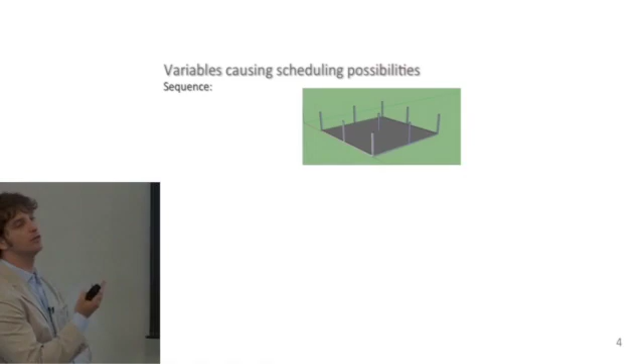A simple example is taking a look at 9 columns. You have 9 choices to install the first column, 8 for the second, 7 for the third. There's actually 9 factorial, or 362,000 ways, to install 9 columns in sequence.

Another such variable is labor capacity. Think of a construction manager considering up to 5 carpenter crews, up to 5 masons, up to 5 rebar crews, or up to 5 MEP crews. That's a total of 625 resource capacity configurations that the manager needs to consider.

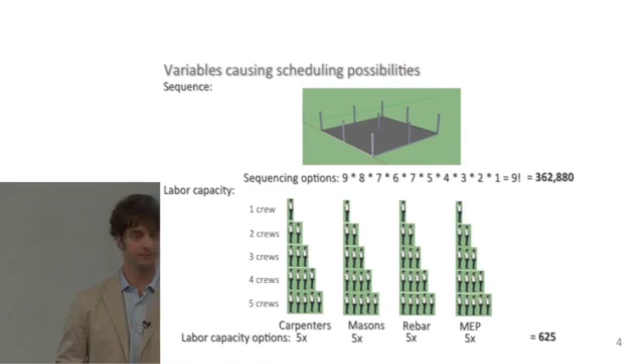And these are not the only 2 variables. I've introduced construction sequence and labor capacity. Another such variable is schedule execution, and more precisely, what I'm interested in are delays. When you delay a construction project, you poorly execute it halfway through, and that changes the ranges of metrics that are available to you in the future.

Another variable I'll be looking at is the construction scheduling method. Each method models constraints differently and therefore has different limitations. I will show you the limitations of current tools today in this presentation.

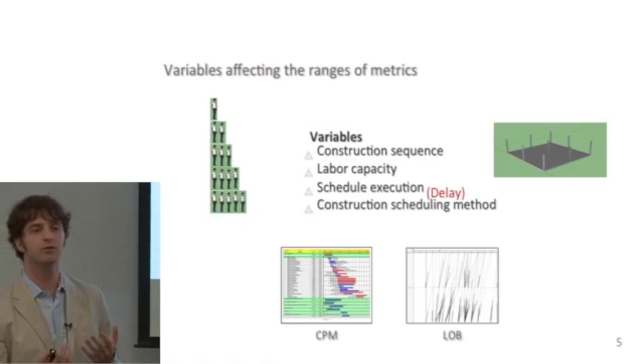The second observation is that construction sites are empty. I've worked on construction projects across 3 continents, and I can assure you that almost all of them look something like that. I invite all of you to look at the next construction site you see and count how many people you see on site. Think of how much extra work you could be doing at this given time.

To validate this observation, I performed an experiment on the IR Deto project in the Netherlands, where I split the project into 403 zones, each one roughly the size of this room. I found that on average, 3% of these zones were being used for construction.

I repeated this experiment on the bioengineering, chemical engineering project next door, where I took a photograph of 18 bays every 21 minutes and counted which of these bays had people inside of them. And I found again that roughly 3% of the space was being used for construction.

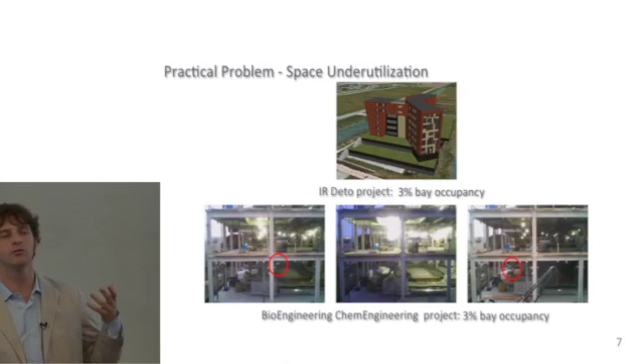These are 2 projects 10,000 miles apart, and these numbers were consistent across times of the day and days of the week. 3% is an extremely low number. This really tells you that construction scheduling methods need to maximize space utilization, therefore shortening construction duration. Empty construction sites point to a significant potential to schedule more processes concurrently, increasing space utilization and reducing construction duration.

But you can't simply increase space utilization by just cramming a lot of people onto a construction site. That leads to spatial clashes. An example of a spatial clash is if you have a construction layout like this one, and you schedule process A and process B at the same time. It leads to a spatial clash, which reduces safety, quality, and productivity, and is thereby undesirable.

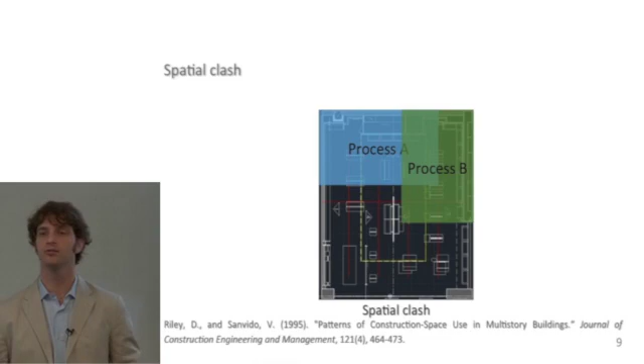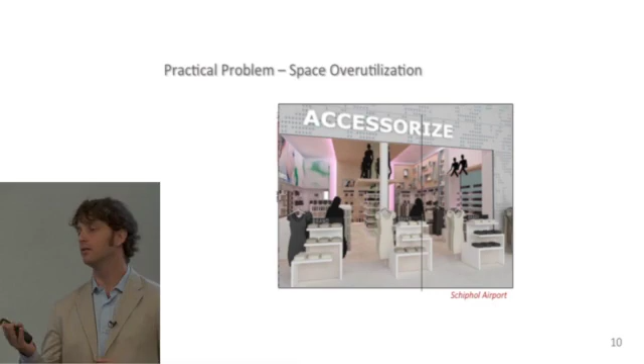I validated this correlation between overuse and reduced productivity on the Accessorize project, where a project that had a duration of 4 weeks was forced by Schiphol Airport, the airport in Amsterdam, to a duration of 2 weeks. This was a hard deadline. This area would turn airside, and to access it, you need a plane ticket. This resulted in 61 spatial clashes that I measured on the construction site, which caused 18% of the total labor hours to be lost. This shows you that construction scheduling methods need to eliminate spatial clashes.

So you need to maximize space utilization while eliminating spatial clashes.

Clearly, there's a trade-off between space utilization and construction duration. So how do construction managers find that right level of space usage amongst the millions of scheduling possibilities that exist? Well, today they create a single schedule using the critical path method or the line of balance method. This is inefficient, and I will later show you why.

Imagine that you create a single construction schedule represented by this dot here. Even when you draw the axes of construction duration and space usage, my question to you is, how good is this schedule? How close to the limits, or how fast is it compared to other schedules for this construction project?

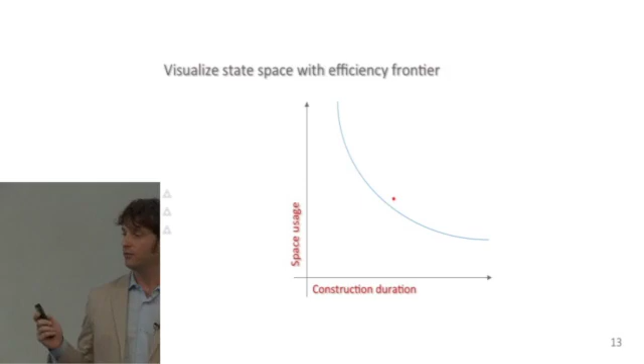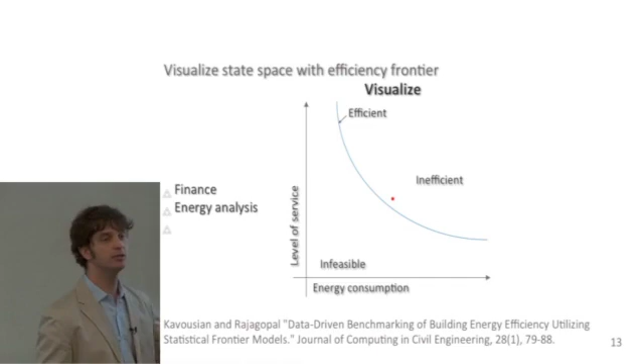Other fields understand the trade-off between two metrics by drawing an efficiency frontier that visualizes the sets of efficient, inefficient, and infeasible solutions. In finance, you correlate risk and expected profit. In energy analysis, they correlate energy consumption and level of service. And in healthcare, they correlate the number of nurses and dialysis machines to the number of patients treated.

So I started to get interested in whether you could do this for construction. And if you could, then this line would represent the fastest a construction project could be built for a given level of space usage, which I would call the operational efficiency frontier.

The research question that I'm presenting here is, what is a method for construction managers to visualize the scheduling state space by demarcating the sets of infeasible, efficient, and inefficient scheduling solutions? Once you have this frontier, you still need the schedules.

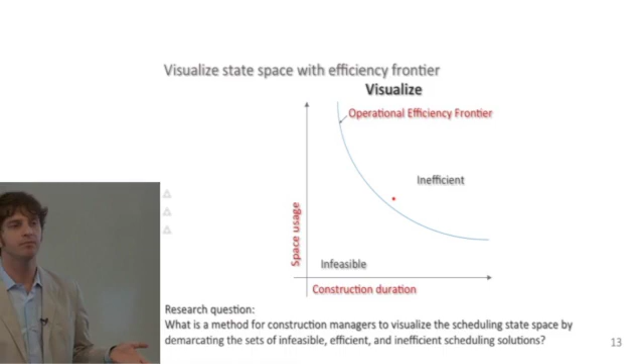You need to go out there and build it. So what you really want to know is, which of these variables that I introduced can you change to navigate the state space by automatically generating thousands of feasible schedules?

And the research question is, what is a method that enables construction managers to navigate the state space by automatically generating multiple feasible schedules? Once you've generated these schedules, what you want to do is manipulate the efficiency frontier.

Manipulate the efficiency frontier with these variables and move it to a new location, thereby enabling more efficient solutions for your construction project. And the research question is, what is a method that construction managers can use to manipulate the sets of infeasible, efficient, and inefficient solutions?

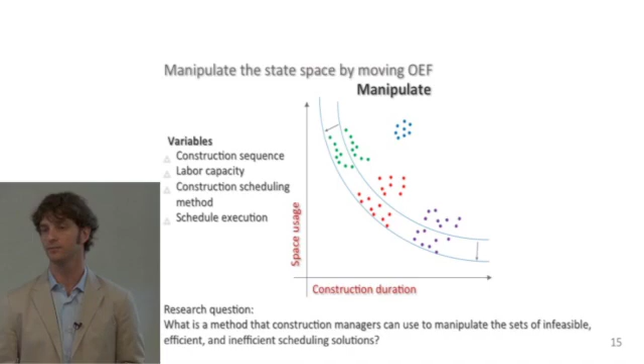To recapitulate, the first research question is, how can we draw the operational efficiency frontier that divides the state space into efficient, inefficient, and infeasible solutions? The second question is, how can we move that frontier? Which variables allow you to move that frontier? And the third research question is, what is a method that enables construction managers to automatically generate construction schedules?

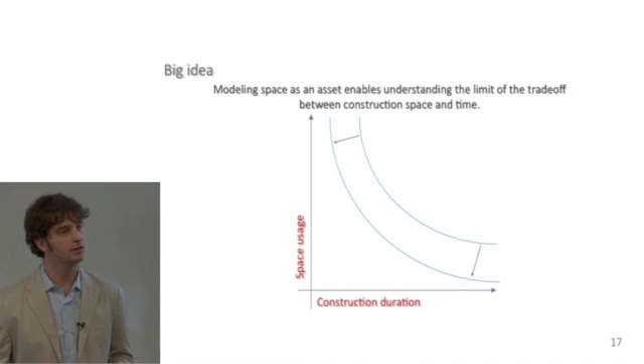So the big idea theoretically is, how can you model space as an asset that enables understanding the limit of the trade-off between construction space and time? From a practical perspective, if you understand this limit, you can then move it, thereby enabling faster construction schedules.

So I'll start with my first contribution, an automated scheduler called the tri-constraint method. And before I introduce the tri-constraint method, let me tell you about what construction schedulers need to do, be they human or algorithmic. At the very least, construction schedulers need to create feasible schedules.

To do that, they must satisfy functional requirements. You cannot exceed the available labor, you should not schedule crews in the same space, and you need to satisfy the laws of physics. The mechanism that guarantees that you do not violate these functional requirements is called the constraint.

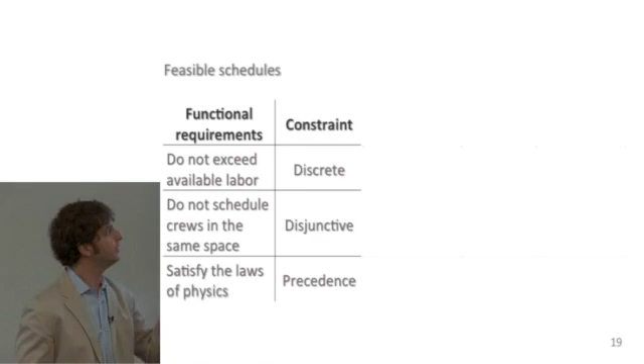The constraints that model these three requirements are discrete, disjunctive, and precedence. And what distinguishes these constraints from each other, and this is a critical point, is the types of resources that they model. The discrete resource models labor.

And what's special about labor is that it can have a capacity greater than 1. You can have 2, 3, 4 cranes. You can have 2, 3, 4 crews, right? What's special about the disjunctive constraint is that it models the space resource, which has a unary capacity.

There's only one space that all construction processes on a construction site need to use. All processes use the exact same space, and there's only one space.

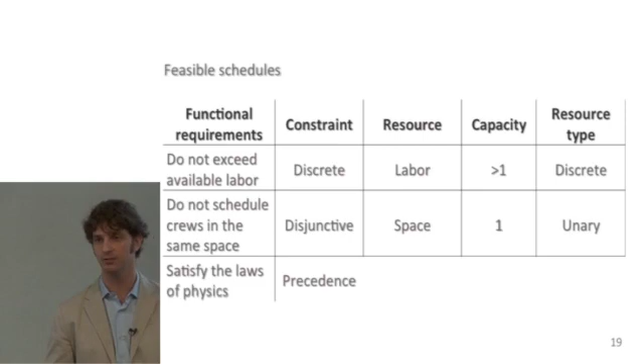And what's special about the precedence constraint is that it does not model resources. You either turn it on, and you get logical schedules, or you turn it off, and you try to build a roof before the foundation.

It took me 3 years to unify knowledge from other fields into the table that you see today, and to categorize the constraints this way. And it's critical to the construction method that I've built.

So what is happening in construction management or construction scheduling today? Precedence in terms of constraints. Precedence constraints were introduced in 1961 by a previous professor at this department, and they have been operationalized for over 50 years using the critical path method—really the most widely used, the founding stone of construction management today.

Discrete constraints, like labor, have also been extensively researched, and they're applied to what is called modified CPM. So they modify the CPM by adding discrete constraints to it, and that has been researched. What has not really been studied a lot is the disjunctive spatial constraints.

The key to understanding disjunctive spatial constraints is understanding spatial representation. There are 2 ways you can represent spaces. You can either use an area value, like 50 square meters, or you can use Cartesian coordinates. The area values don't use reference frames. They're not located anywhere. And the Cartesian coordinate systems are differentiated by whether they use a geocentric or an allocentric reference frame.

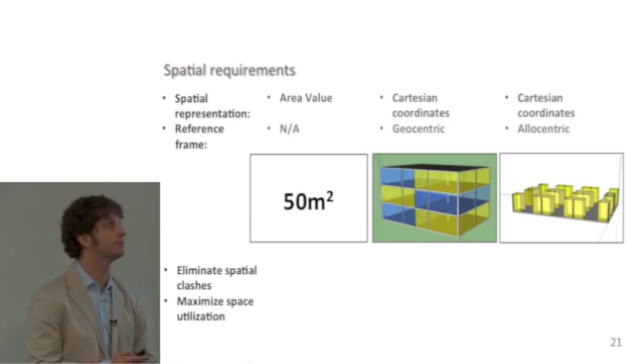So let's look at the 2 requirements that we set forth originally, which was eliminating spatial clashes while maximizing space usage. With an area value, you don't know where that area is, and so it's not possible to see if they're adjacent or on top of each other. So you can't eliminate spatial clashes and maximize space usage.

With geocentric reference frames, you can partially avoid spatial clashes by not scheduling processes in the same zone, but you can't tell if work in adjacent zones interferes with each other. You can only sort of look into one zone at a time. And you can't schedule more than one process in a zone concurrently, so you can't maximize space usage. What really allows you to maximize space usage while eliminating spatial clashes is Cartesian coordinates and allocentric spatial requirements.

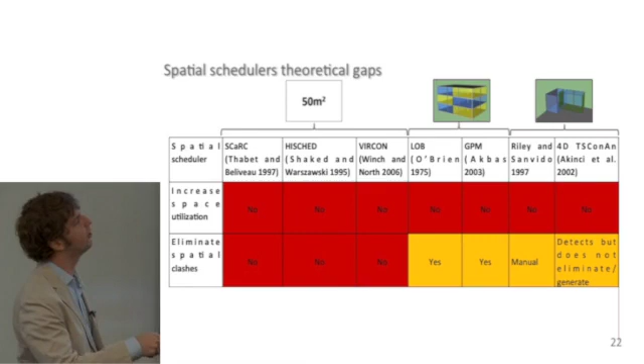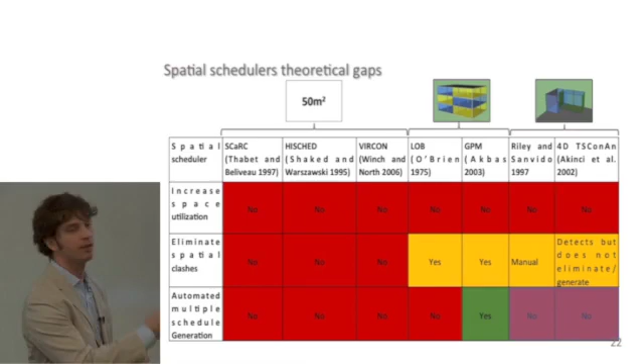That's all they do. If you look at the ability to automatically generate multiple schedules, you can see that the theoretical gap lies because allocentric Cartesian coordinate spatial representation has not been combined with automated schedule generation. And this is what I have done.

So now I will refine research question 3. How can construction managers navigate the state space by automatically generating multiple schedules? By resolving precedence, discrete, and disjunctive constraints, using construction process spatial requirement allocation methods that use allocentric and Cartesian coordinate spatial representation. So what you're trying to do for your scheduler is resolve precedence, discrete, disjunctive constraints, and for the disjunctive spatial constraints you want to use allocentric and Cartesian coordinate spatial representation.

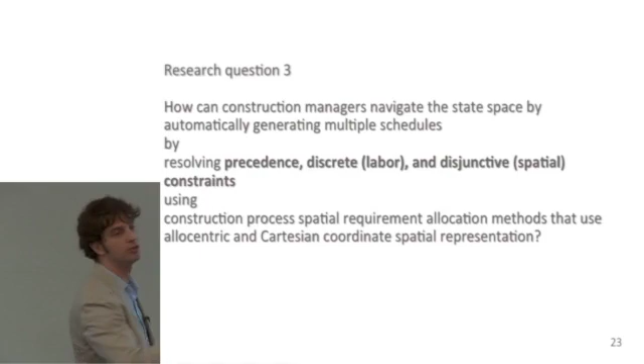So how did I answer this research question? I created a method called the tri-constraint method. It's called the tri-constraint because it models those three constraints. I used a prototype software to run this method, and then I compared its results to those of the two most widely used scheduling methods in industry today, the critical path method and the line of balance method. The critical path method is the one used by most of the industry. The line of balance method is a spatial scheduler, which is why I wanted to compare my spatial scheduler to it.

And we tested it on 3 construction project case studies. So what is the tri-constraint method?

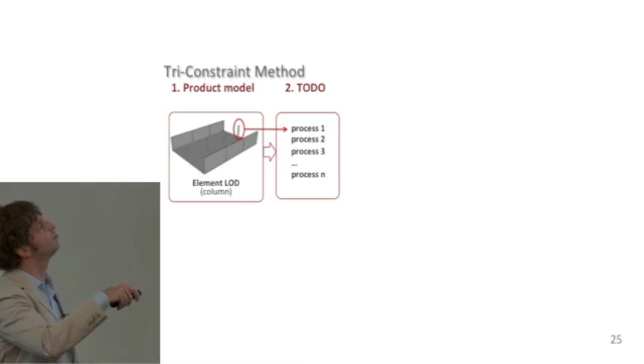You start with a product model, and this is what you want to build, what you want to end up with and hand to the client. You convert the elements in the product model to a list of processes that you need to do, the to-do list. If you execute all of the processes in your to-do list, you will have your product model. This is actually a 19-step process that I'm not showing here.

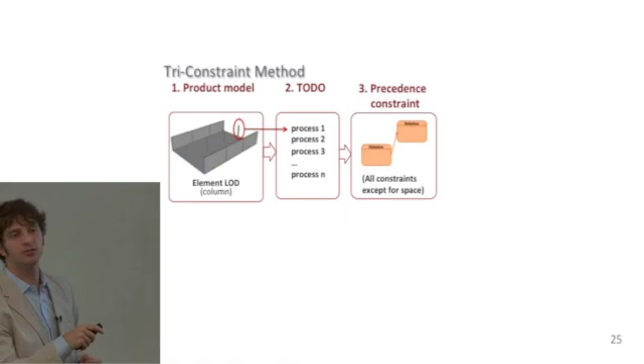Then you apply precedence constraints, which removes processes from the to-do list that violate precedence constraints. At this point, you have a can-do list that satisfies precedence constraints. Then you apply the disjunctive spatial constraint to get a can-do list that satisfies precedence and space. You apply the discrete resource constraint that removes the processes that violate that constraint, and you get a can-do list that satisfies precedence, space, and discrete resource.

At this point, you have a list of processes that you can schedule. You can schedule these to create a feasible schedule. You select the top one, and you schedule it. And that's really the core of this method.

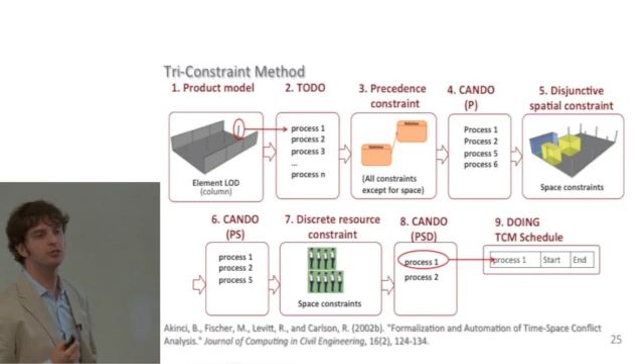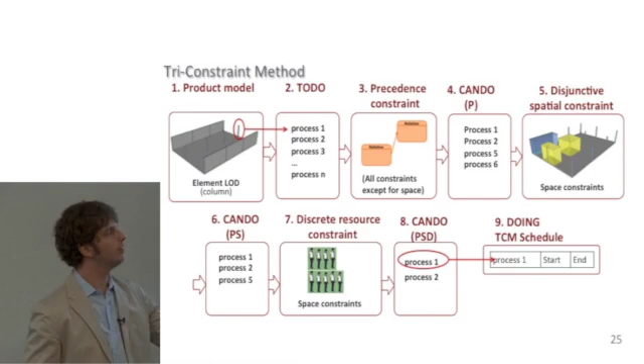The second thing I have done is I've introduced a method that shuffles in the next simulation. The method remembers the order of the can-do list, and it changes it by moving process 2 to the top, and scheduling, instead of process 1, schedules process 2. This is really what enables varying sequence, which is what gives you the thousands of feasible scheduling solutions. This has also not been done in the context of a spatial scheduler.

So we now have a spatial scheduler that can generate thousands of feasible schedules, and we can measure the construction duration for each of these schedules. What we want to do is measure the space usage. And if you look at space utilization metrics today, you can see that no space usage metric really allows you to measure space utilization for an entire project. Current space utilization metrics only allow you to measure space utilization for single processes or groups of processes. So we need a new metric.

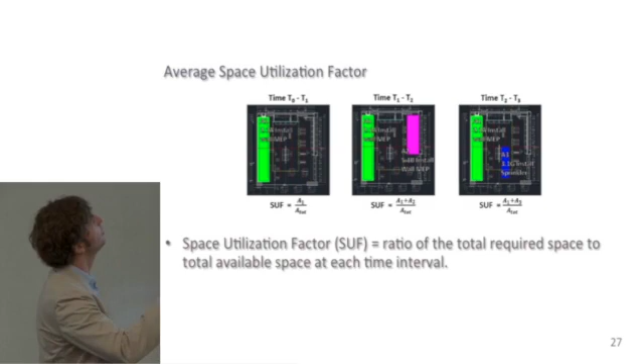And I did this by introducing the average space utilization factor. The average space utilization factor uses the space utilization factor, which is simply the ratio of the total required space, the ratio of these colored rectangles, divided by the total available space, the black rectangles, at each time interval in the project. You simply average the SUFs to get the average space utilization factor, the ASUF. This is a metric that gives you space utilization for an entire project.

Just a quick clarification. Is that the space that has all the prerequisite activities performed for these activities to take place, or just space in the building somewhere that may or may not be ready for these tasks to be done? So this is the entire space. Yes, yeah, ask me that. This is a good question.

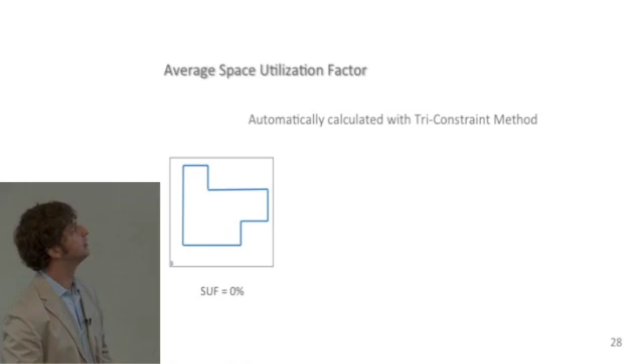So this average space utilization factor is automatically calculated with the tri-constraint method. The blue line represents the boundary of your construction site, and you can see that 0% of the space is being used in this image. Here you can see that 100% of the space is being used for construction, then 83 and 48%. So when you average this for the entire project, you get 72%, which is your average space utilization factor.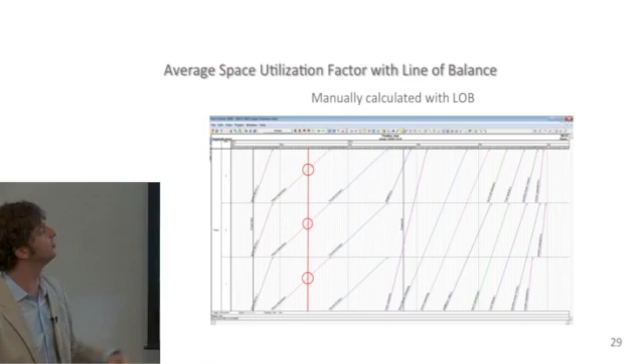Another example is for this day. You can see that work is occurring in zone 1, nothing is occurring in zone 2, and work is occurring in zone 3. You do that for the entire project, average the numbers out, and you get your average space utilization factor.

So what we want to do is compare the tri-constraint method to the CPM and line of balance schedules. To do that, we'll run 10,000 TCM simulations, create a line of balance schedule, create a CPM schedule, and then compare the space utilizations and construction durations for these three methods.

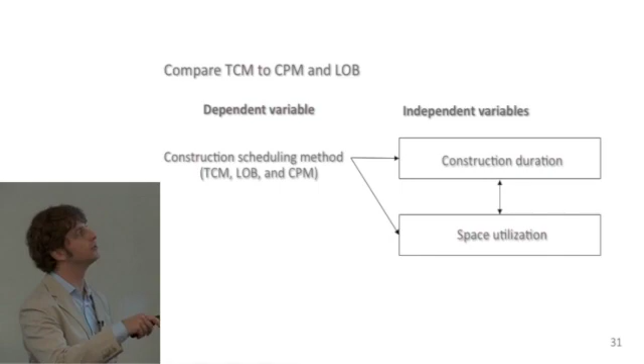The dependent variable of this experiment is the construction scheduling method, whether you select TCM, line of balance, or CPM. You want to study the effect of these scheduling methods on construction duration and space utilization, and then see the relationship between these two: construction duration and space usage. That's what we really set out to do.

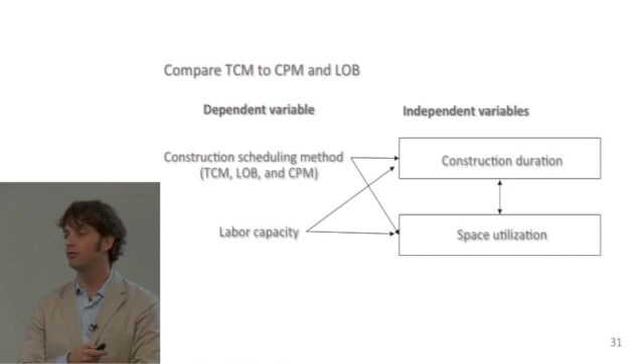The problem is that labor capacity also affects construction duration and space utilization. Therefore, to eliminate the effects of this variable, we remove it by assuming infinite discrete labor resources for this experiment. So we'll assume that you have as many people as you need at any time.

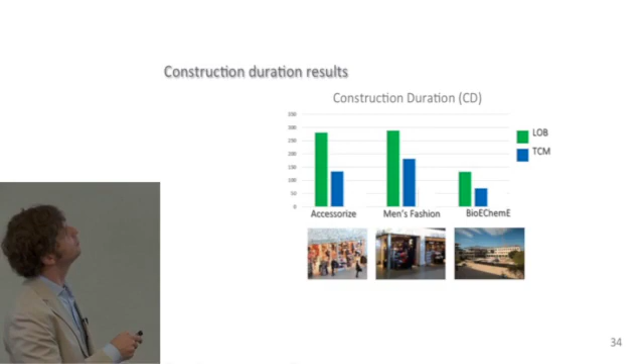So what are the construction duration results between these three scheduling methods? When you compare the line of balance method to the tri-constraint method, the new method that I developed, you'll see that the line of balance method has durations on average 45% longer than TCM. This is for two reasons. The first is that the line of balance method uses these large chunks of space, which is pretty inefficient compared to the smaller, exact spatial requirements of TCM.

The second reason is that the line of balance method only creates one schedule, whereas the tri-constraint method looks at 10,000 possibilities.

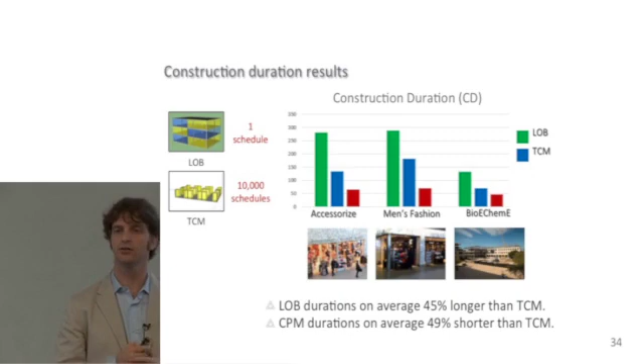So now let's look at the critical path method, the most widely used method in industry today. You can see that the critical path method durations are half as short as those of the TCM method. So you might be thinking, well, CPM is the method I want to use. Well, the reason you get these short durations is simply that if you assume infinite resources, CPM schedules everything in the same space at the same time, which is not feasible.

This is the method that's used by industry today, the most widely used method. It does not model space. It does not let you understand how to move crews or work through space.

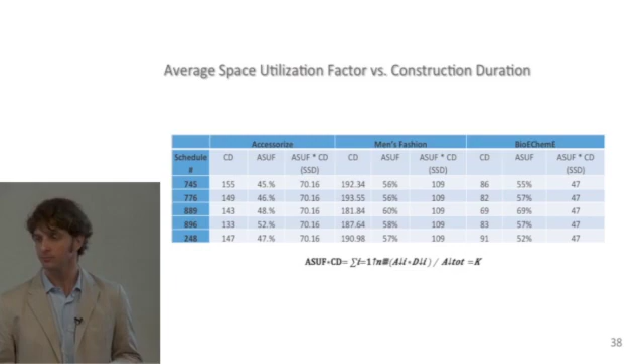And it's actually a mathematical formula given by this: the average space utilization factor multiplied by the construction duration is the sum of all the individual processes times the area of the individual processes times the duration of the processes, that whole thing divided by the area of the construction site. Just to give an example, the ASUF times the construction duration, which is a constant, is area of process A times duration of process A, plus area of process B times duration of process B, plus area of process N times duration of process N. This whole thing is summed and divided by the total area.

This constant that you're calculating does not require you to create a schedule. It's really easy to calculate. All you do is multiply the areas times the durations and divide by the total area of the construction site.

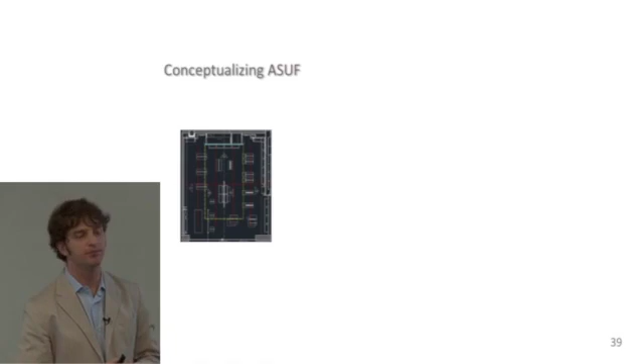To conceptualize the average space utilization factor, I'll show a graphical way that demonstrates it. Imagine you have process A with a duration of 1 hour that needs half the site, or 54 square meters in this case.

What you need to do is extrude the area by the duration of the process. So this is 54 square meters, and this is 1 hour. If you do that for all your processes for this construction project, each one of these blocks is a construction process. And that's what you end up with.

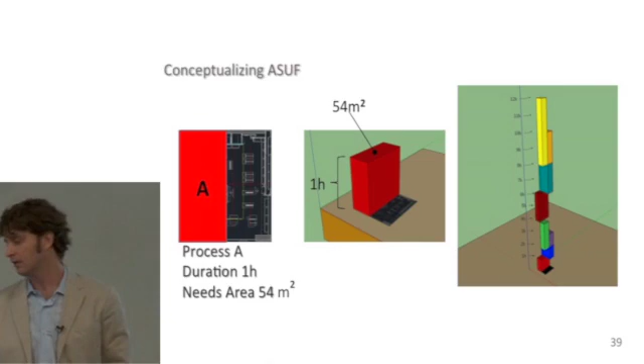So what is the construction process? If this is your processes, how do you build, or where's the time dimension? Well, you can see that with this graph over here. You start the project, and at time 2, you're working on the green and the blue process. At time 7, you're working on the light blue process. You can see that the black area at the bottom is your construction site, and you're really conceptualizing construction as throughput via the capacity of the construction site's area.

So why is ASUF times construction duration a constant, since that's what that equation gives us? The reason that it's a constant can be seen by taking two sequences. These are two actual sequences of the same project. In sequence X, you finish the project in 12 hours. In sequence Y, you finish in 9.

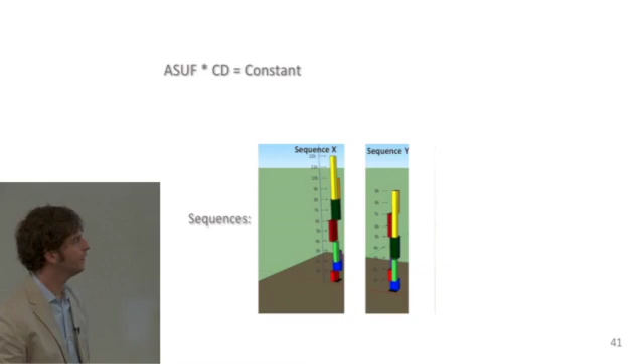You finish faster. So what's the average space utilization factor? Well, the average utilization of space is a column of uniform cross-sectional area. The average area of the colored blocks equals the white block in sequence X. And in sequence Y, the average area of the colored blocks equals this column. The volume of those blocks is constant. That's really what that constant is - it's just the volume of these blocks.

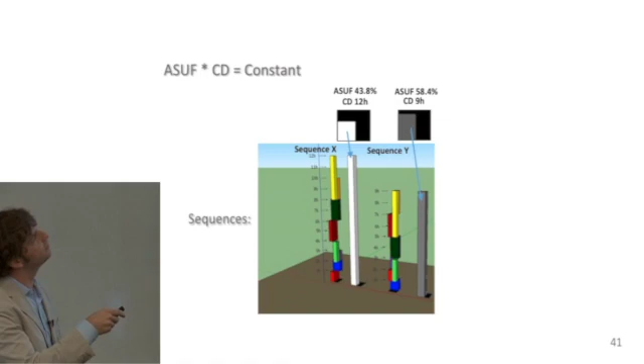So, of course, if you have a longer column, the white area is the percentage of the total area that's being used. You can see an average space usage of 43.8%. So when 43.8% of the total area of the construction site is being used for production, your duration is 12 hours. If you want to decrease the duration, you've got to increase the area for a fixed volume. I've used the same width, but you're using just that little bit more average space. From 43 to 58 reduces duration from 12 to 9.

And that's this equation here. This equation gives you the operational efficiency frontier. You do not need to calculate, you do not need to schedule to obtain this equation. So let's look at it for a little bit.

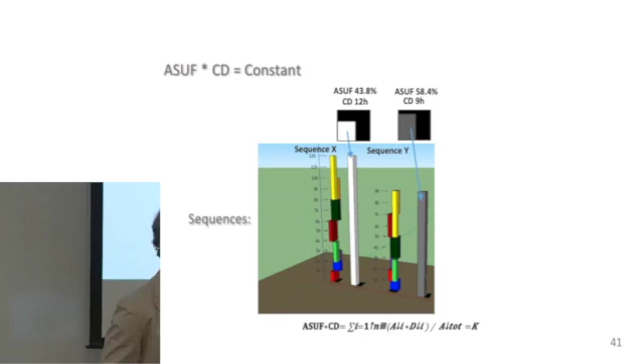What happens when ASUF is 100%? What happens when you use 100% of available space throughout the entire construction project? Well, 1 times the construction duration is a constant. So the height of that column, if you use 100% of available space for construction, is equal to the fastest that this construction project can be built if you do not allow spatial overlaps. It's kind of the same as if you took these colored blocks and converted them to water, an incompressible liquid. They would fill a column of this height.

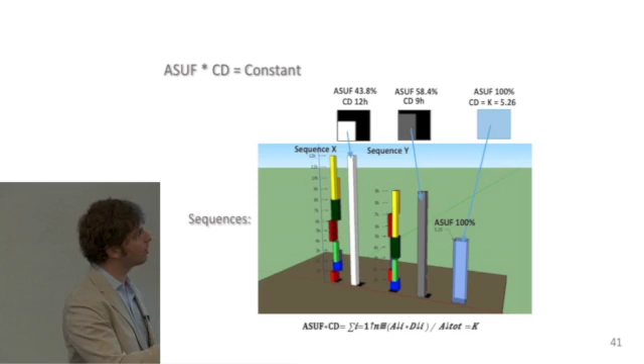You can also mathematically derive this equation, which I will not get into here. So what we want to do is understand the trade-off between space utilization and construction duration. To do that, I've shown you how to calculate this operational efficiency frontier, and I'll show you how it works next. What we really want to understand is which of these variables can you use to navigate along the frontier, and which of these variables can you use to manipulate the frontier to new locations.

I've shown you the operational efficiency frontier, the equation for that: construction duration times ASUF, average space utilization factor, equals a constant. What I'll do next is show you the effect that construction sequence and construction scheduling method have.

What we'll do is use 3 case studies, the 3 case studies that I think I introduced earlier. We'll take 3 construction scheduling methods: the critical path method, the tri-constraint method that I've introduced, and the line of balance method.

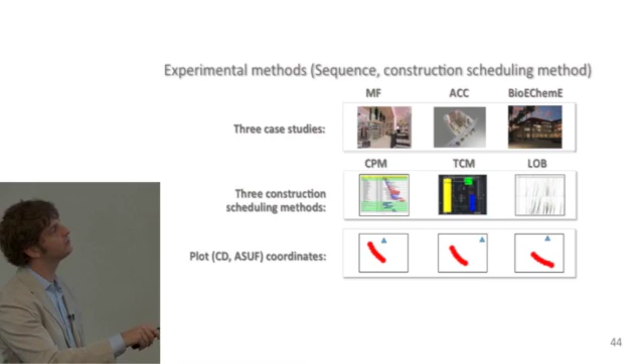We'll basically generate 10,000 schedules with the TCM method, and we have its CD, construction duration, and average space utilization coordinates, so we'll plot those onto 3 graphs for the 3 projects. Next, we'll create a schedule for the line of balance method and plot it there. And then we'll calculate the operational efficiency frontier for these 3 methods and plot it on the same graph.

So what do the results look like? We'll start with the BioEChemE project. First, we'll plot 10,000 schedules using the TCM method. You can see that this really shows you the effect of varying construction sequence. What is construction sequence? It really gives you these dots.

A human scheduler will create the line of balance method and manually calculate the average space utilization factor, like I showed you how. Then you create a CPM schedule. When you have infinite resources, a CPM schedule gives you one duration.

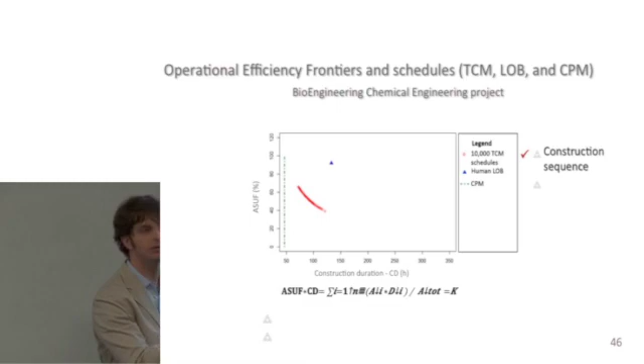CPM does not use space, so we basically drew a line that represents 0 to 100% space usage. That's the CPM method. Now we need to use this equation: for each of these projects, we took the area times duration of each process, summed it, divided by total area, and got an asymptotic curve.

We drew it for the line of balance method. That was the first thing we did. Notice that the manual calculation lies actually within 3% of the value predicted by this theoretical equation.

Then we plotted the operational efficiency frontier for these 10,000 points. You can see the effect that construction scheduling method, changing from line of balance to TCM, gives you a much more efficient efficiency frontier, and you can see that the durations are shorter, somewhere around 72 versus somewhere around 130.

So why is this the case? Where's the inefficiency coming from? This is comparing not two schedules, but two scheduling methods. The inefficiency comes from the fact that the line of balance method uses these large chunks of space. It gets the same result just using more resources, while a TCM uses the exact spatial requirements.

So just to contextualize this, you can see that the results you're getting theoretically are around the maximum you can get with TCM, around 60%, with the line of balance somewhere around 90%.

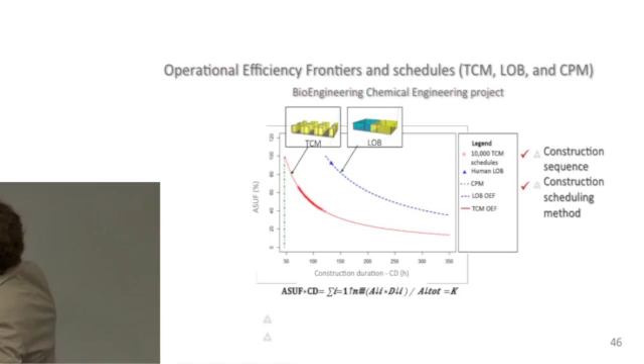So I'd like you to take your attention - if you remember, I measured that the industry today uses an average of 3% of space usage. So if you extruded this graph all the way to the X over there, that's where current construction industry practice is today, the red X outside. As you can see, there's significant potential to improve this process.

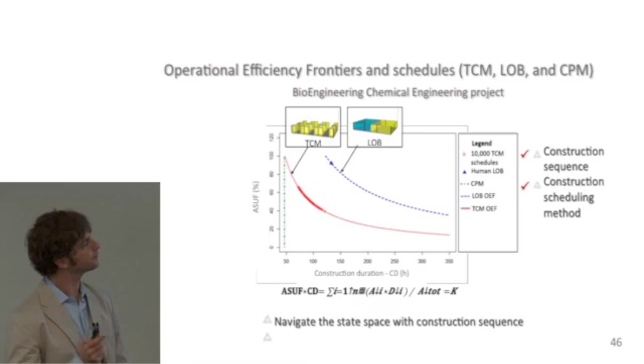So what I've demonstrated here is how you can navigate the state space with construction sequence, and I've also shown how you can manipulate the state space with construction scheduling method.

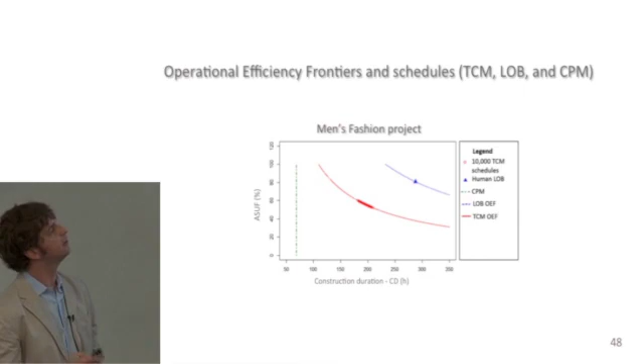For the three case studies, next we'll look at the men's fashion and the accessories projects. We follow the same procedure, and you can see that you get really very similar graphs. The TCM method is more efficient than the line of balance method in allocating space.

The CPM method, even though the tri-constraint method is designed to, at every point in the simulation, use all available space - it's a greedy-first algorithm that literally does not move forward in time until you run out of space. It just schedules everything it can at any given time, and it tries 10,000 ways to do it. You can see that you don't get close, nowhere close to the durations given by CPM.

CPM is in the set state space of infeasible solutions for this method, and it really is infeasible because it's scheduling everything in the same space at the same time.

So what I've shown is the operational efficiency frontier, how to navigate the state space with construction sequence and manipulate it with construction scheduling method. Next, I'll show you the effect of labor capacity.

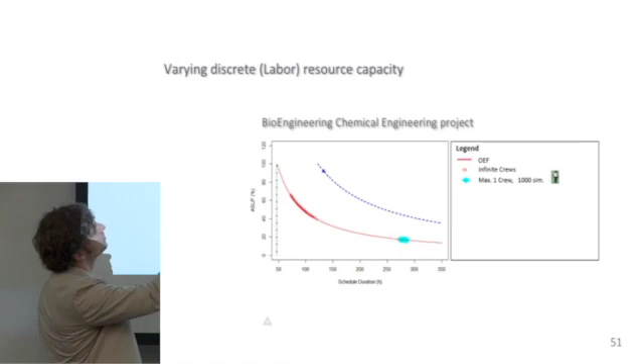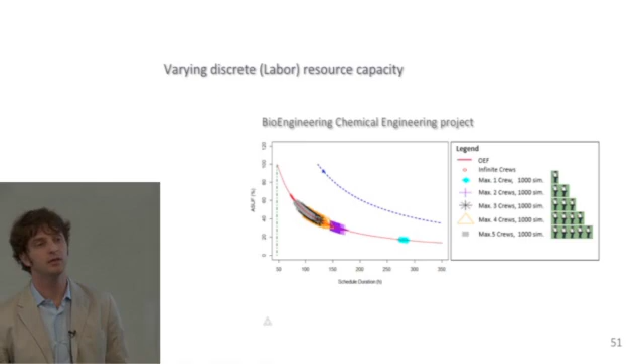So what if you have two crews available? That's 1,000 runs - three crews, four crews, five crews, and the red dots are infinite crews. You can see how you can navigate the state space with a discrete resource labor capacity variable.

So I've shown the labor capacity. Next I will show you the effect of schedule execution, more specifically, delays.

Consider an example project of 8 construction processes and 4 possible sequences. This is the Gantt chart. You can see that the colors are the same, representing the individual processes.

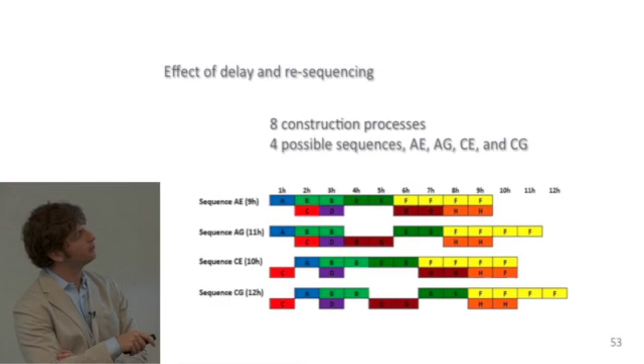For the same construction project, you have sequences AE, AG, CE, and CG, which give you durations of 9 hours, 11 hours, 10 hours, and 12 hours.

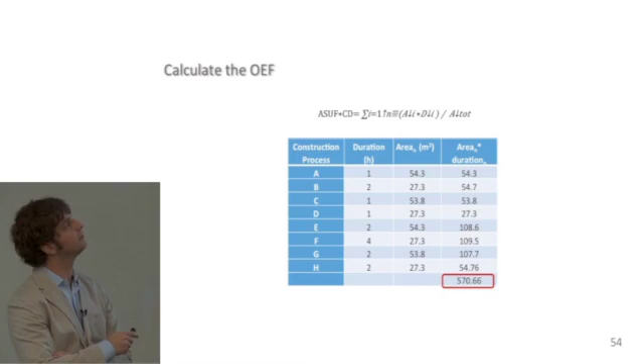You use this equation to calculate the efficiency frontier. You multiply the area times the duration for each process, you get the sum product, which is 570, and then you divide that 570 by the total area of the construction site, which in this case is 108 square meters.

That gives you a constant of 5.26. This is an asymptotic function, Yx equals k. So you plot this along with the 4 sequencing options that you have. At this point, you're on the efficiency frontier. There's no delays.

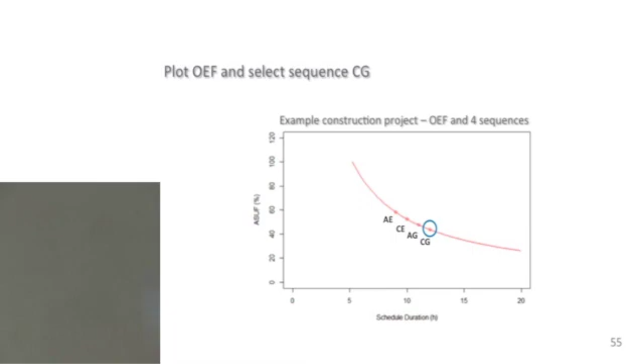You select sequence CG. Note that this is the slowest sequence available to you, but maybe you select it because it's the cheapest.

So the construction project starts, and as often as anyone in construction knows, one of the processes is delayed. If you recall, what we did originally is we multiplied these two, the area times the duration, to get 570, and we divided 570 by the total area to get the constant 5.26.

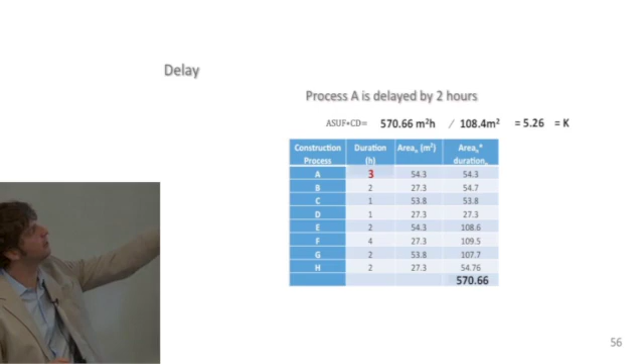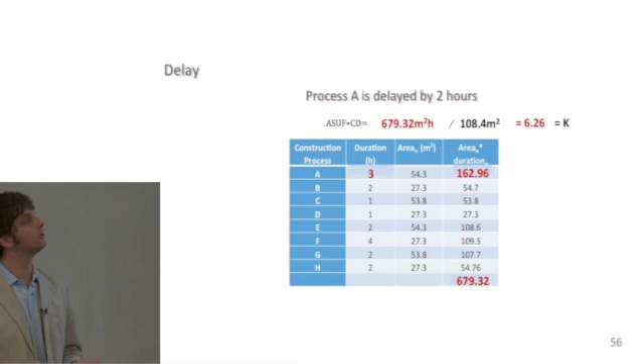Process A is delayed from 1 hour to 3 hours, which changes the area duration to 162, which changes the sum product to 679, which, with the same area, changes the constant to 6.26. For an asymptotic curve, increasing the constant moves the curve to the right.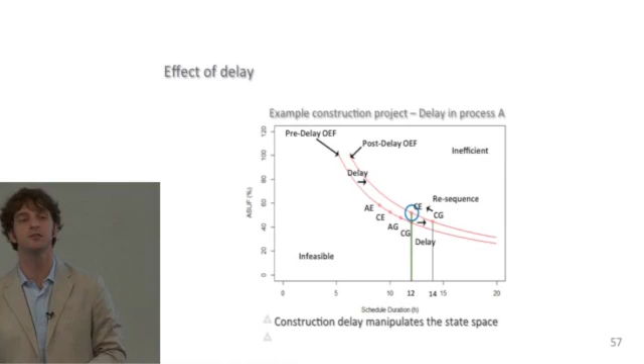What you can then decide is to mitigate this delay. You select sequence CE. You resequence from CG to CE, thereby mitigating this delay and finishing the project at 12 hours again. So this shows you how a construction delay manipulates the state space, and also how you can navigate the state space by resequencing.

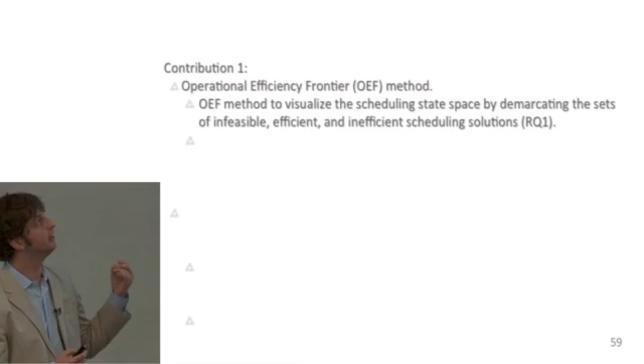So we've seen schedule execution and delay. The contribution I presented today is the operational efficiency frontier method, a method to visualize the scheduling state space by demarcating the sets of infeasible, inefficient, and efficient solutions. That's research question 1.

You can use that method with specific variables to move the operational efficiency frontier. I've demonstrated how you can do that with schedule execution, specifically delays, and the construction scheduling method, which is research question 2.

The second contribution I presented is the tri-constraint method, a method to navigate the state space by automatically generating multiple schedules. I've shown how you can vary construction sequence and discrete resource capacity to that end.

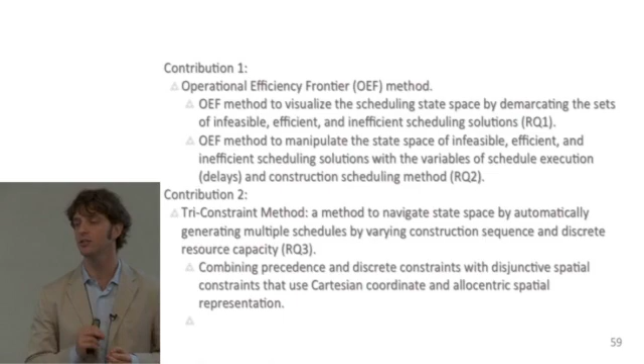More specifically, within the construction scheduling method, my contributions are that I've combined precedence and discrete constraints with disjunctive spatial constraints that use Cartesian coordinate and allocentric spatial representation.

The second sub-contribution for the automated scheduler is I've introduced a method that allows you to vary sequence by shuffling construction processes in the can-do list. This has also not been done.

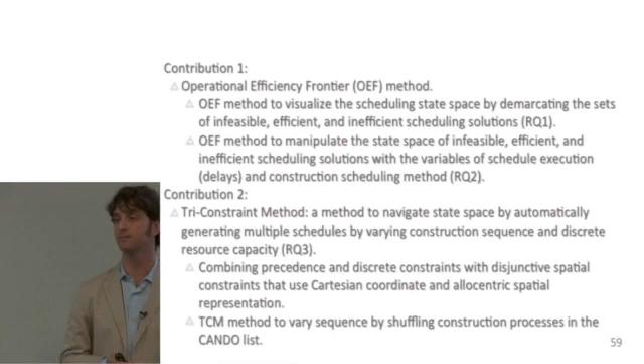So what are the practical implications? Well, first of all, I've placed an emphasis on considering space as a resource. You can really start thinking of throughput via construction sites' area capacity. Space has special properties: it is unary, there's only one space available, and at the same time it is free. That's why coordinating it is critical to construction scheduling.

Another implication is that with this method, you can generate thousands of feasible schedules, and you can visualize, navigate, and manipulate the state space. Simply put, these implications will make it faster and cheaper to build construction projects.

So for future work, I've introduced the operational efficiency frontier, an automated scheduling method, and shown how these variables can be used to navigate and manipulate the state space. Instead of what we're doing today, randomly varying sequence, you'd want to develop heuristics to generate not a random 10,000 set of schedules, but the right, quote unquote, set of schedules. You want a more effective way of navigation.

Next, you want to rank the can-do list, so not shuffle it, but rank it, for example, by location, which will enable you to do things such as workflow, which is not currently done in the method.

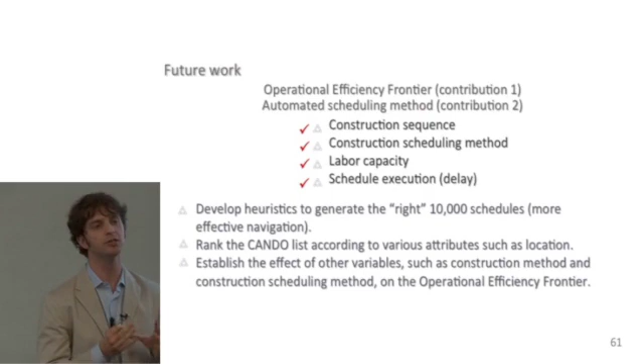And finally, I'd like to test the generality of the operational efficiency frontier in other fields. For example, can it be used in logistics?

So the PhD journey is a strange journey because it is one of the few journeys in life that you must tread alone. At the same time, it is impossible without the help of so many.

I would like to start by thanking the institutional support of CIFE, the Charles Leavell Fellowship, and Slavenburg construction in the Netherlands. Where would one be without their friends? They're really what pulled me through the low points during this research. So thank you. I have been, one of the great blessings of this endeavor was to be surrounded by colleagues of such caliber who served as examples which I have aspired to and learned from.

I have to thank the research assistants, first and foremost, for putting up with me during the endless hours of debugging, simulating, discussing, brainstorming, and researching.

I have to thank special people from the industry whose belief in an innovative construction future enabled this research, and they really helped us validate and crystallize some of these problems.

Thank you. Of course, a big thank you to Michael Lepech, Ram Rajagopal, and Warren Hausman, who are on my committee. In institutions such as this one, it is truly difficult to find people that will simply help.

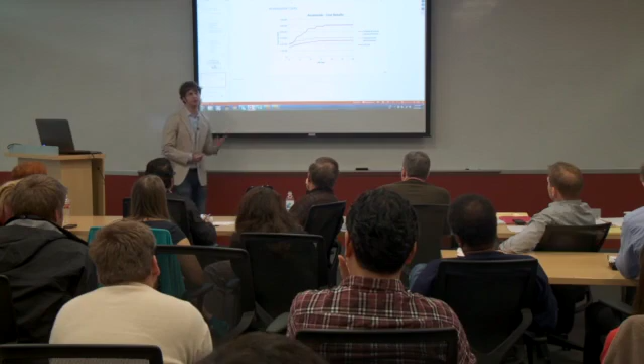What you're doing is calculating the number of idle days for each one of these schedules, so this is really calculating costs. So you're correct—within these 45 minutes, this work really doesn't represent a large portion of everything I've looked at. But the question is how do you look at idle days, coordination, etc. The key is you need to calculate... what I was optimizing for was duration, because of the mathematical relationship involved.

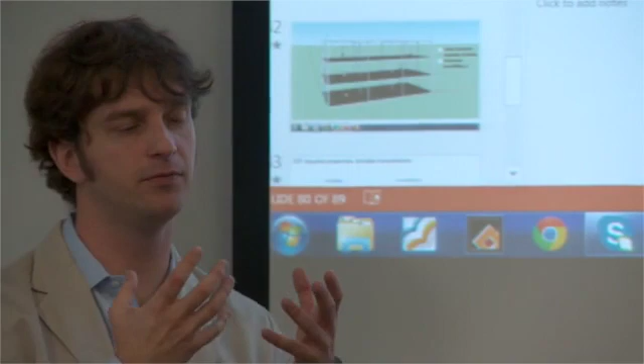But you want to optimize for idle days and ease of building. This also, by the way, ties into what Professor Levitt was saying, that a very critical part of the research was the definition of the level of detail. So basically what I'm doing is looking at the scope, the quantity of a product you're working on, and the reason I'm looking at single elements is because that's what BIM models are.

They're groups of elements. But to answer the question, what you want to do is aggregate these elements, because at this point in time—as Professor Levitt was saying—you can't give schedules that are that detailed. So you want to aggregate these elements to create schedules that humans can use. And that's really, I think, in construction, the solution: you need to create data or information at a coarse level of detail, increase it automatically, simulate at that level, and then aggregate it again.

And that would be a little like a critique about subcontractors having to have a relatively efficient use of the job sites, given all the other job sites they have to manage. Yes. Yeah, absolutely.

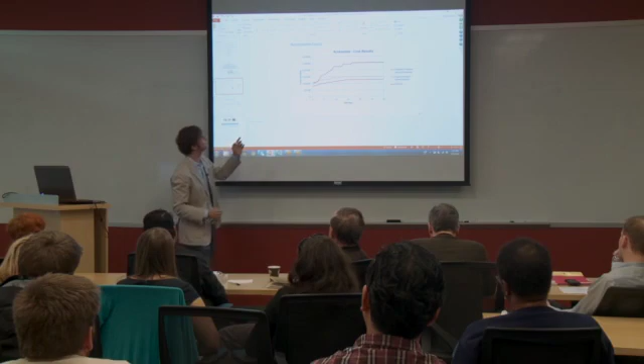What's the cost? The cost is fairly simple. Once you have the schedules, you just look at which crews are working on which day. And if somebody shows up to work, even works for 2 hours, you pay for a full day. You'll see here that, interestingly, the fastest schedules are a little more expensive than the cheapest, which kind of makes sense.

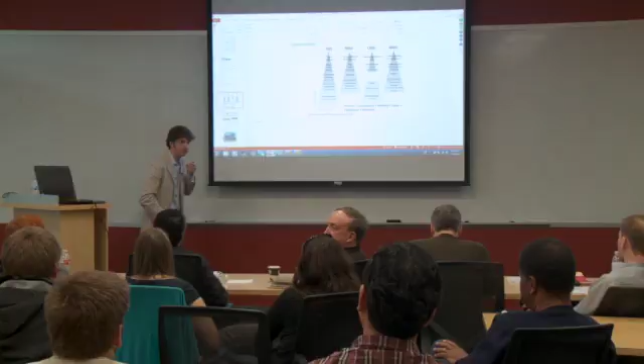Have you looked at the constraints proposed by the Toyota production method as maybe incorporating into your algorithm? So constraints such as? Let me look at available resources like steel and product resource availability and weather delays. I feel like those could be modeled as variables, including in the algorithm. The critical thing in this research is the level of detail.

What you're saying is other constraints. So other constraint types, there's two parts to this question. Within the types of constraints that I've shown, what other subcategories are there? So that's answered here. Subcategories are the product, the method, the organization, and the actual process. The organization can also be equipment or material. So those are basically discrete resources as well. One of them is a stack, because you put the crew back in the stack, material gets used.

And the other question was about the constraints themselves. When you look at Echeverry's paper, which gives you a list of, I think, 18 construction scheduling constraints, you can actually categorize all of those by precedence, disjunctive, and discrete. So to answer the question, at this point in time, I am not aware of a construction constraint that you cannot model using these three types. But I'm certain that it exists.

I think fundamentally what you want to do, I've really been interested in, out of these three, can you make one? I've shown from Echeverry's work how each one of the 18 that Echeverry presents is actually one of these three, but can you then actually create one type of constraint? I'm not sure.

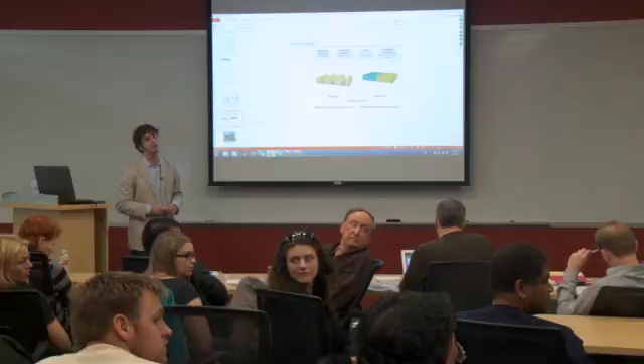I thought it was really interesting in terms of looking at scheduling as a spatial utilization problem. I do wonder, when you're presenting it as a trade-off between duration and space utilization, why you've chosen that as a trade-off. Would someone actually suggest or pick one with a lower space utilization and a higher duration, or what makes that trade-off interesting?

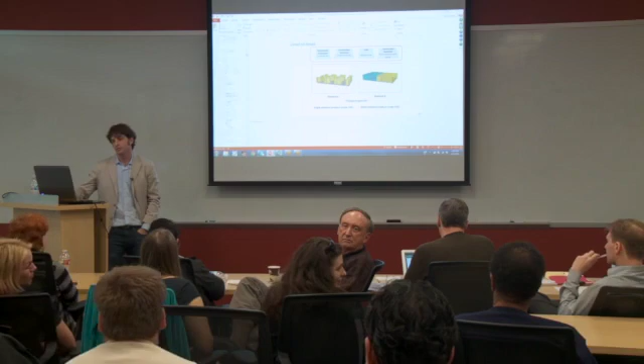René, could you clarify - you showed the cost of idle time. Why couldn't you just put that into your equation as a third dimension, where you could then optimize, have a 3D plot, for example? Completely, because then you come much closer to the way the subcontractors think about the job. If you can minimize their idle time on the job, they love it. That's just good.

There are two reasons. The first is that when you look at idle time, it's a stepped function. I don't know for certain, but I think you might be able to find heuristics for it, like a limit which you can't exceed, but I don't think you can find a mathematical equation that will predict it. If you look at the largest number of subcontractors you have on the job at any one time, and you see that they were all there the whole time, with idle time being anything not being used up to 50 minutes, that would give you a realistic measure for subcontractors' efficiency.

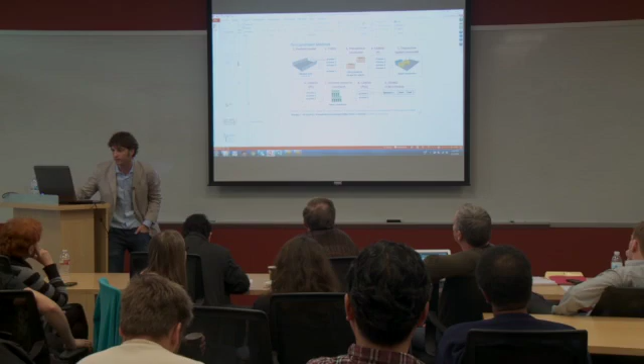I'm actually researching this - it's a 19-step process that I don't know if I'll be able to find right now. There we go. So these are 8 of those steps. You start with an element, you choose a method, you get the resources, you find the areas, you modify the production rates, and that gives you the construction operations. The key is how do you then get the precedence, how do you do this?

So you want to automatically generate the input file from the model, right? I think we'll close the public area here. Thank you very much.